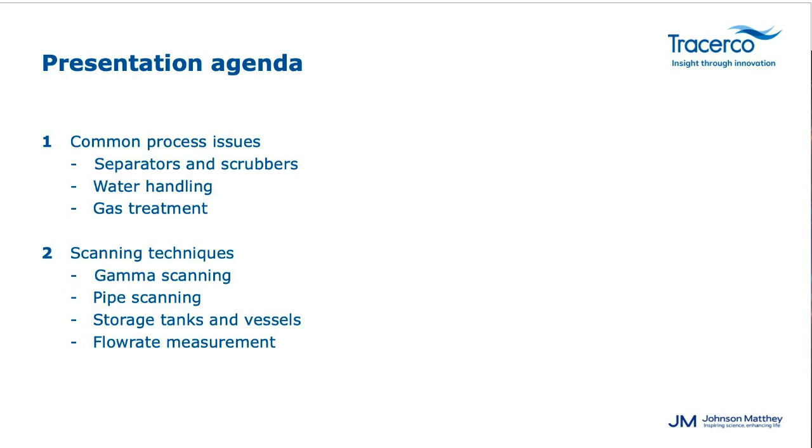Good morning and good afternoon, ladies and gentlemen. My name is William Rivers. I'm the new Markets Manager for Tracerco, and welcome to today's webinar. Today, we're going to be taking a close look at some of Tracerco's techniques that can be utilized to help optimize and actually solve some of your offshore process problems. During today's presentation, we'll be discussing common process issues, as well as the techniques Tracerco uses on a daily basis to help solve customers' problems and issues.

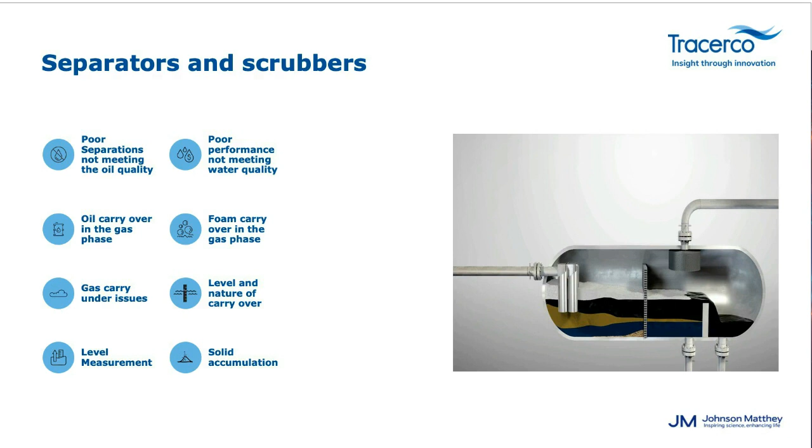So we're going to go through some of these issues now with the next slides. When we come to gas treatment and conditioning, whether it involves gas treating facilities, gas dehydration facilities, or gas drying or separation, there are a number of issues that can impact the performance of the plant, whether it's not meeting the gas treating performance plant or the CO2 or the dehydration capabilities.

And that could be due to internals, or could be some slugging, overloading, or recycling. It will be very difficult to actually do any CFD and give you an accurate root cause of the problem. But if we utilize the capabilities we have in Tracerco, for example tracer injection and pipe scan, as well as gamma scan, we'll be able to determine exactly the root cause of the problem, especially when we use the tracer injection.

And we could use the tracer injection relevant to the different phases. We could use gas tracer injection, oil tracer injection, the organic tracer, or aqueous tracer injection. All these tracers, when we utilize them in the system, will be able to give us exactly what's happening within the vessels, whether it's caused by bad distribution, bad internals, or bad design altogether. So we have quite good capabilities to do that.

When we come to produced water issues, there are different aspects of produced water that need to be addressed. If you have poor water quality coming out of the separators, the poor quality can be due to, again, the usage of chemicals, the wrong use of chemicals, excessive amount of usage of chemicals, internal design, or damaged internals.

But also, bad water quality can be influenced by flow pattern, as well as solid accumulation in the system. And of course, there is poor water quality in the primary separation, which is the separators, or there's poor water quality coming out of the secondary and tertiary stages of the treatment.

And in all these cases, gamma scan, neutron backscatter, and tracer injection can be used to identify those factors, those elements. Of course, very often we start with the simplest process diagnostic, and if required, we go to the next stage and the next stage.

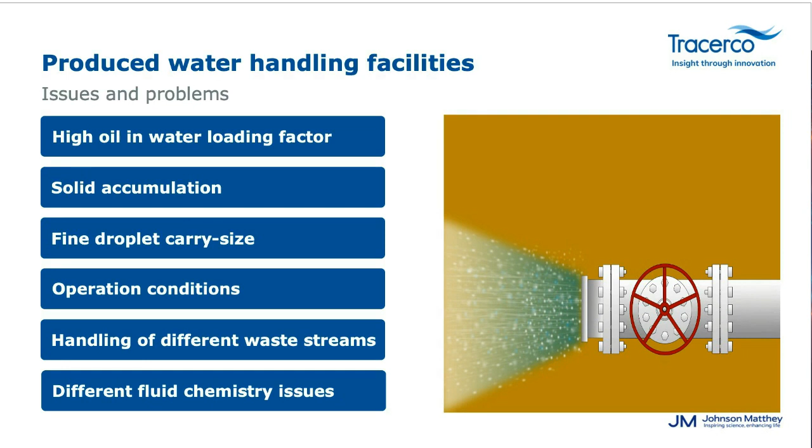When it comes to actually identifying the characteristics of the water, there is, of course, understanding the droplet size of the water throughout the process, and if there's any impact of solids accumulation or solid carryover with the liquid. This will be used by using conventional techniques available to the industry for measuring the oil droplet size or the solid distribution, quantifying the amount of solids in the system.

So overall, when we have issues with produced water, the combination of understanding the issues in the separators, which is the primary treatment stage of the water treatment, and combining the understanding of the performance and the droplet size distribution in the water in the second and third stages, we'll be able to understand exactly whether the root cause is in the systems upstream of the produced water system or within the produced water system.

And by doing this, then we could focus on how to address it and how to resolve these problems. But there are a number of issues that can influence produced water quality: operational issues, hardware issues, chemical issues, and also the common practice they do in the plant.

By doing this process diagnostic, by looking at all aspects of the separator's behavior, the produced water treatment, and the produced water quality and characteristics, we'll be able to understand where the problems are and how we're going to fix it, whether it's upstream, downstream, or within the produced water system.

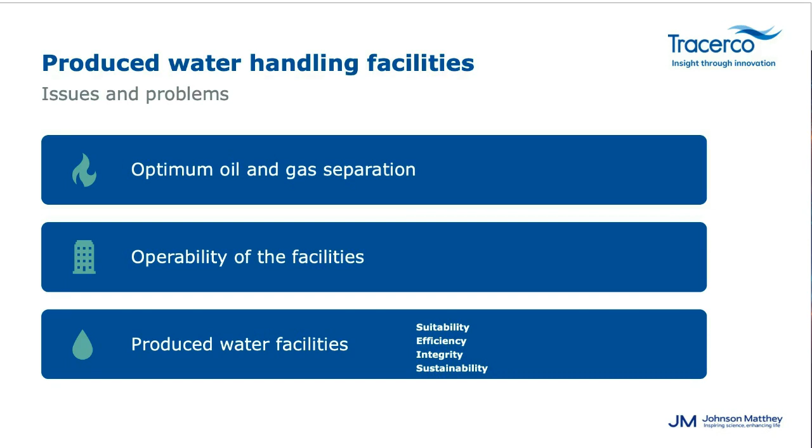Thank you, Wally. Now let's explore Tracerco's first technique, gamma scanning. Gamma scanning utilizes a source and detector to create a density profile, and based on this profile we can determine what's going on inside of your process equipment.

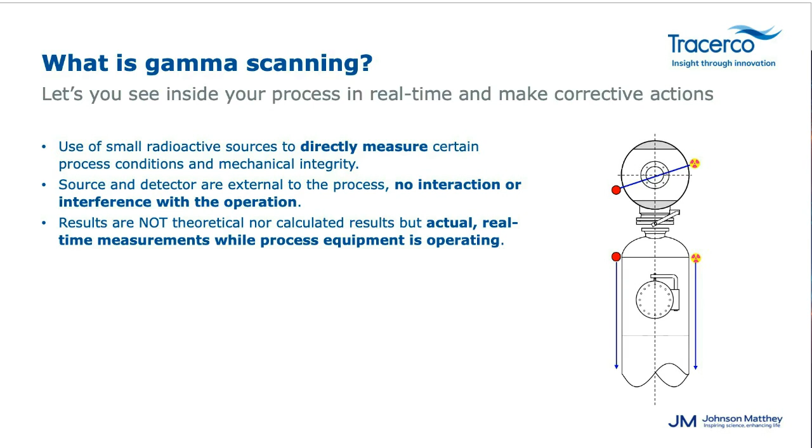Please keep in mind that when doing a gamma scan, or any one of our techniques, this is a real-time measurement. There's no need for shutting down the process equipment or interfering with your normal day-to-day operations. This is an actual real-time measurement while process equipment is operating.

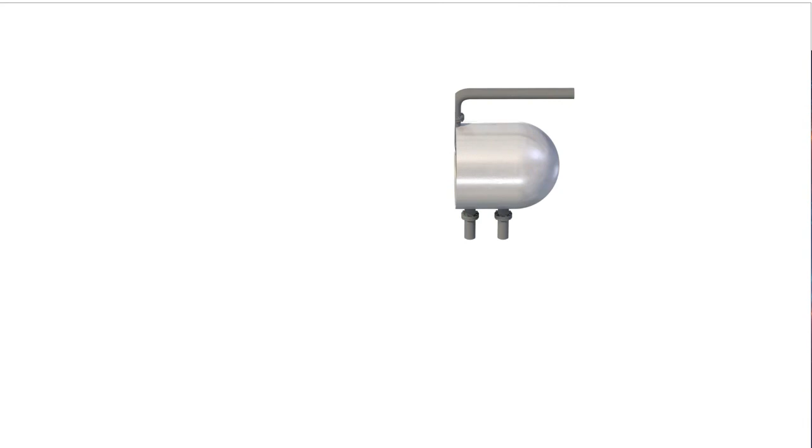To follow up with what Wally said above, let's take a look at the different techniques used to diagnose process issues offshore. The first is the gamma scanning technique. As you can see in this example, on the left-hand side is a radiation source, and on the right is a detector. We start at the top and move our way down, creating a density profile. In this case, we were looking for the liquid bulk level inside of this separator.

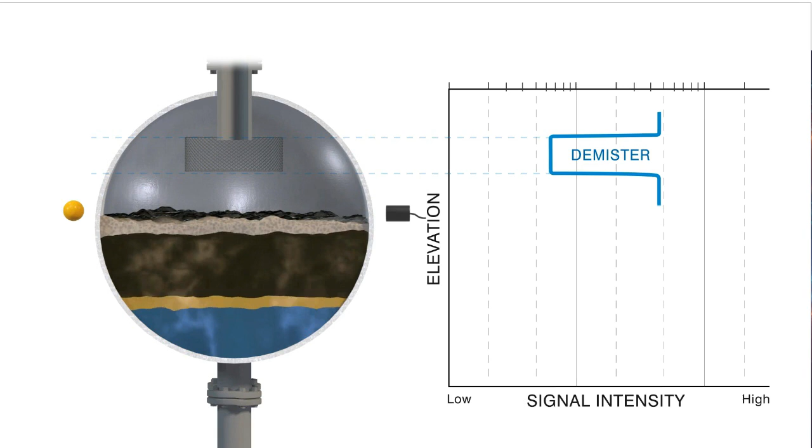Another technique that Wally described was scanning for internals to see if they're in place. In this example, with the radiation source on the left and detector on the right, we scan from top to bottom looking for a density step change. In this case, the density profile on the right shows that the demister is in place.

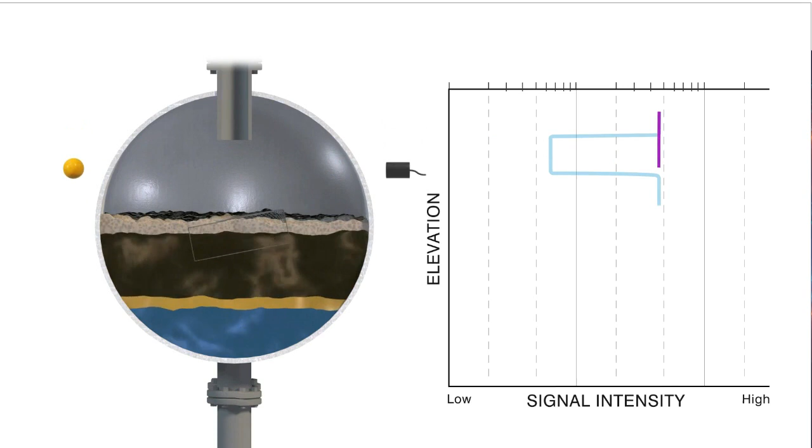Now in the second example, let's explore what the profile looks like when the demister is not in place. Again, scanning top to bottom, you can see over on the right-hand side, in purple, that there is no profile, which indicates that the demister is not in place.

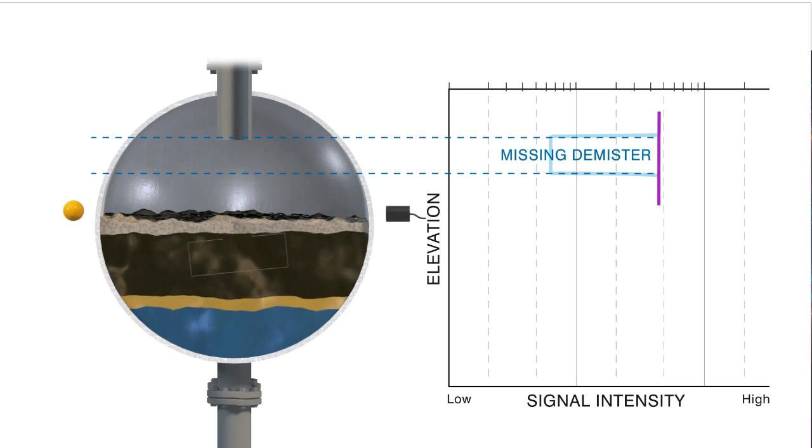Please keep in mind that you can use the same technique to determine if your baffles are in place, or if your mixing box is in place as well.

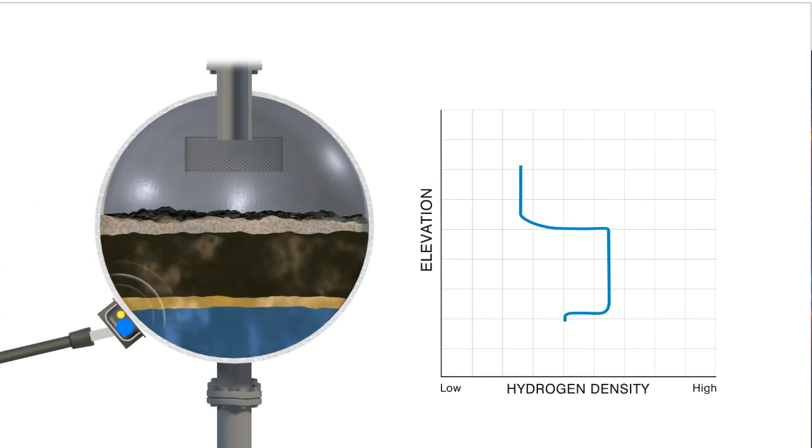Another type of technique that can be utilized is called a neutron backscatter. This technique is used when you wish to identify the different types of layers inside of your separator. Starting at the top and working your way down to the bottom, we can see based on the density profile that there are five different types of layers: a vapor layer, a foam layer, an oil layer, an emulsion layer, and finally a water layer.

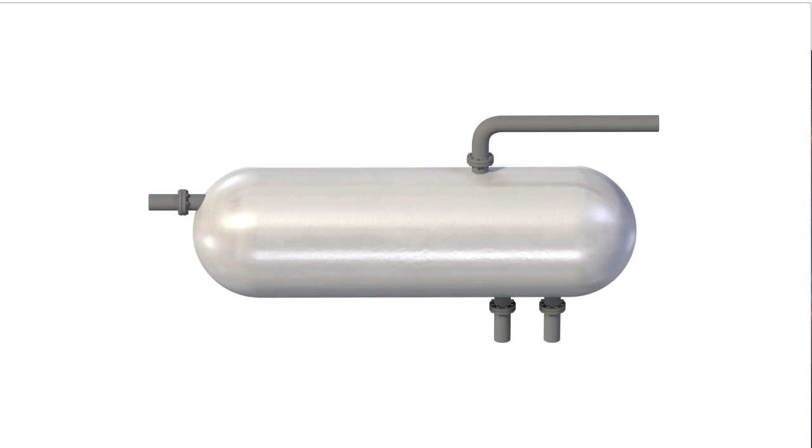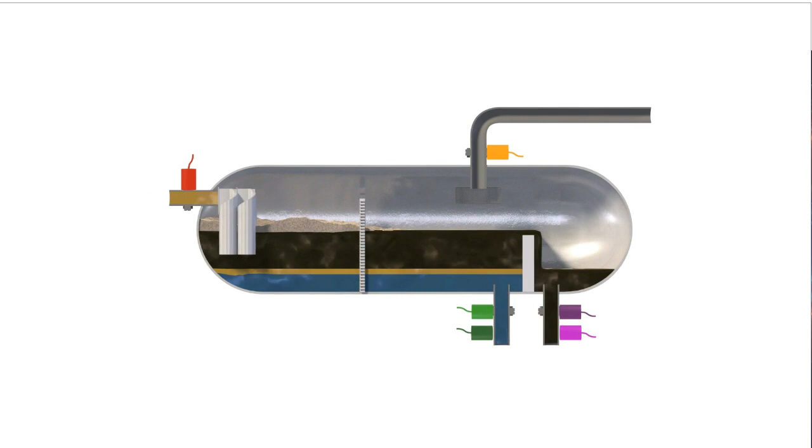The last major technique we can utilize for separation process issues is a tracer study. A tracer study reveals residence time as well as carryover and carry-under. On each major inlet and outlet, a detector is placed.

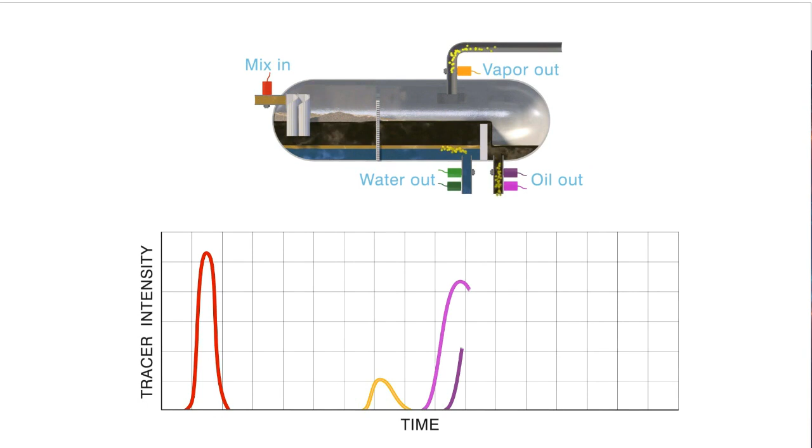A pulse of radiation is released upstream of the separator, flowing through the first inlet detector, through the separator, and out of the major outlet devices within the separator. From this, you can gather the residence time, the carryover, the carry-under, as well as oil velocity and water velocity.

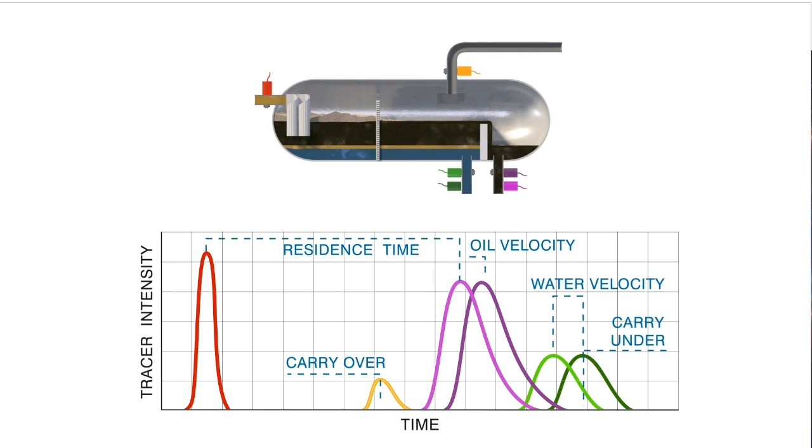Now we'll begin to talk about scanning pipe on offshore facilities. A technique that we commonly use is called PhaseFinder. This utilizes neutron backscatter technology in order to find deposits inside of your pipe.

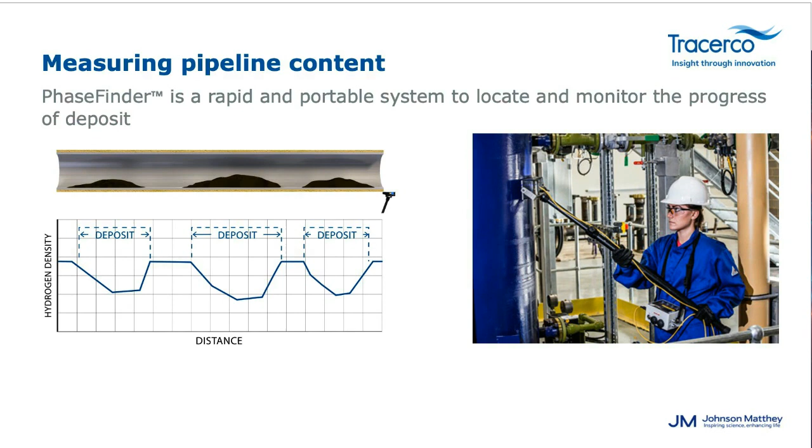The way this technique works is we take the neutron backscatter device, place it on the pipe, and slowly walk along the pipe looking, again, for density changes. As we find the density changes or deposits, we will mark on your pipe where these deposits lie.

If you'd like to look in more detail at what deposit growth is, or the size of your deposits inside of your pipe, we can perform a ThruPipe scan. A ThruPipe scan is a radiation source and detector attached to a yoke. We take this yoke and we walk down your pipe.

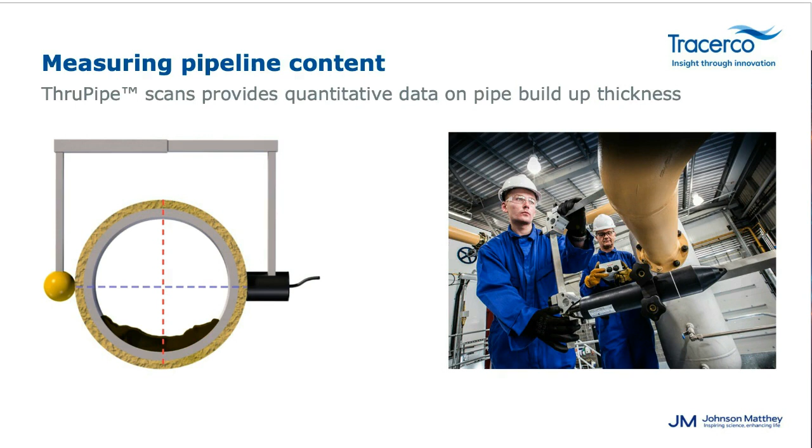As we identify a density change, we rotate it 90 degrees, back it up, and then walk forward again, scanning the same area. This will give a better representation of how high or how large your deposits are inside of the pipe. The last type of scan we can use on pipe is called a ThruVision.

A ThruVision scan is the most highly detailed scan in Tracerco's arsenal. The way it works is we take a source and detector and place them 180 degrees apart on your pipe and rotate it into 9 different positions. From those positions, we can extrapolate over 1,000 points of data.

We translate that into a color-coded map of your pipe, as seen on the left-hand side of your screen. Anything in red is considered highly dense material. Anything in blue is considered less dense material.

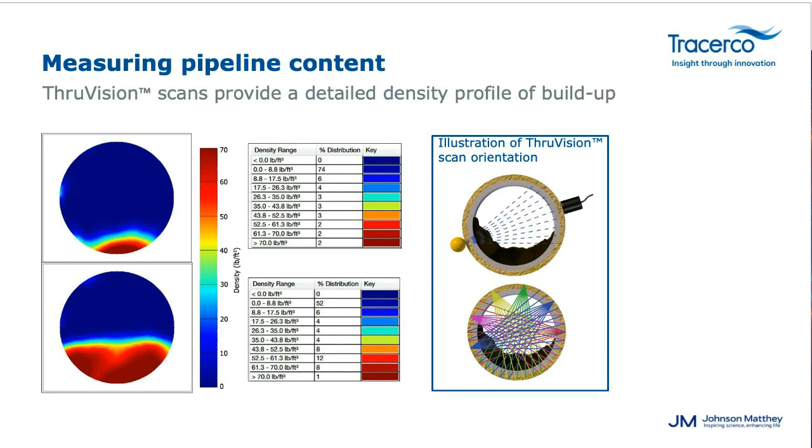For this scan to be most effective, it needs to be performed on a minimum of a 12-inch piece of pipe. Typically, we do these scans on flare lines that have not been cleaned out in some time.

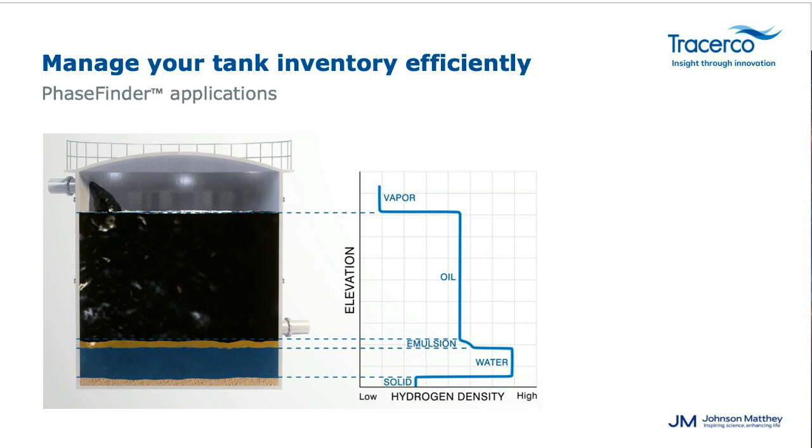Let's move on to another area that Tracerco scans quite often: storage tanks and vessels. As in the separator study, PhaseFinder, utilizing neutron backscatter technology, can help identify the different types of layers inside your vertical tanks. As in the example, starting from top to bottom, you can see there's a vapor layer, an oil layer, an emulsion layer, a water layer, and a solid layer. This is a very efficient and easy way for you to scan quickly and tell what's inside of your tank.

For our final technique, we'll be discussing flow rate measurements and the benefit it can offer you in offshore environments. Similar to a tracer study in a separator, flow rate measurements is used primarily to verify instrumentation is working correctly.

A pulse of radiation is released upstream, travels past 2 detectors. From there, it's a simple calculation of distance over time to verify the instruments are working correctly. Again, this is primarily used to verify instrumentation is working correctly.

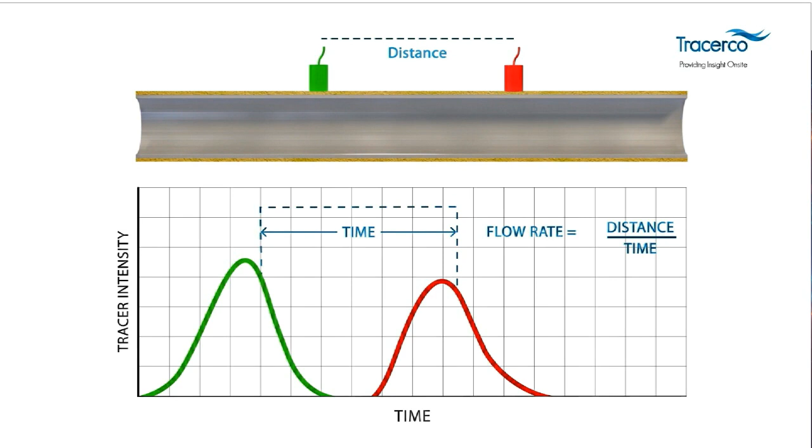Let's now look at a few case studies to demonstrate the value of the technologies discussed above. In our first case study, one of our major operating partners approached us and expressed concern that they were having carryover problems in one of their major vessels and asked us to perform a gamma scan to verify that all the internals were in place.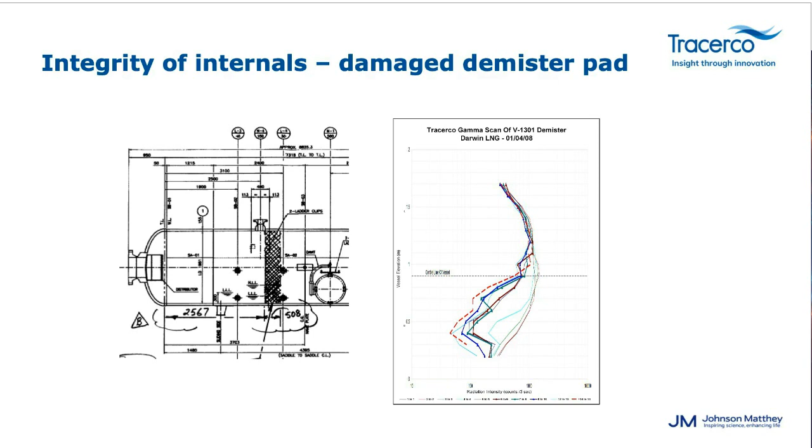As we move down the vessel towards the bottom, the density dramatically shifts to the left, indicating the presence of collapsed demister pieces. As you can see in the scan example on the right of the slide, you'll notice a long snake-like curve starting at the top and curving its way down to the bottom. If the demister was present, the scan's line would have been more tight and in a vertical straight line.

As you can see on the left side of the picture is what a demister should look like when it's in place. And on the right, the damaged demister, which was confirmed by Tracerco Gamma Scan.

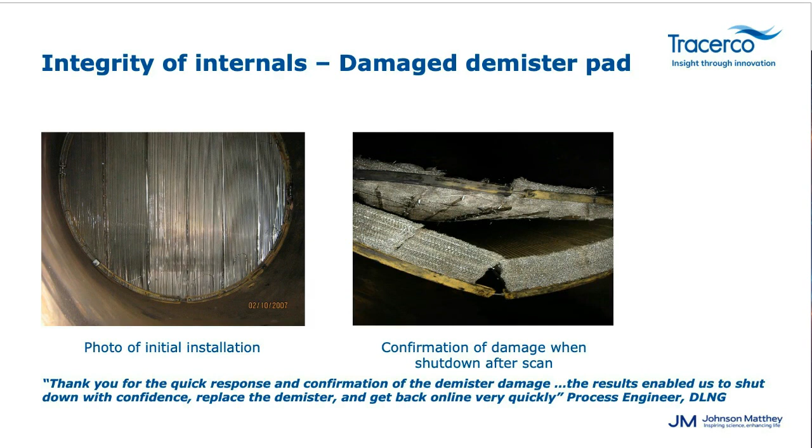In our second case study, Tracerco was helping our customer determine how large the emulsion was inside of their separator. Neutrons were selected as a technique to determine the size. We started at the top of the separator and worked our way down the side. As you can see in the graphic, there is a vapor space, which is represented at elevation 920 to elevation 830 by the blue line starting at the left of the graphic and running straight diagonally to the right.

From this point, the oil layer is measured. In this case, the oil layer is from elevation 830 to 710. Further down the scan, you can see a sharp density shift from elevation 710 to 110. This is our emulsion layer. As you can clearly see, there is no water layer present. The water is mixing inside the emulsion.

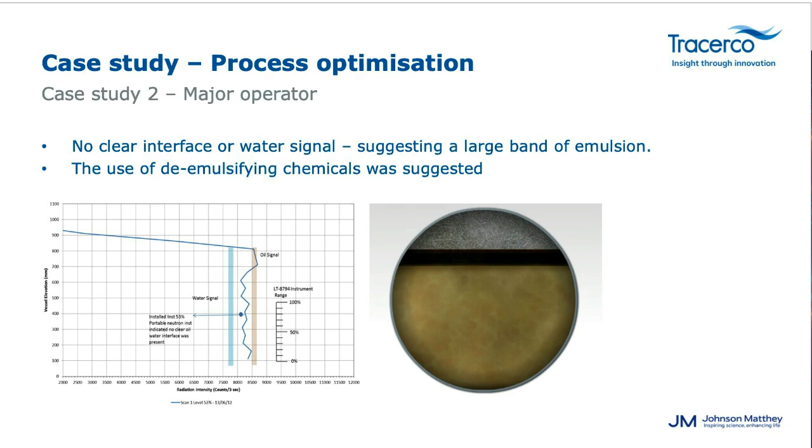Upon the customer receiving the news of our results, we suggested that the use of a demulsifier chemical was needed in order to restore balance to the separator. After the demulsifier chemical was added, you can see the separator process improvement, as now the water layer is clearly present at elevation 350 to 110.

There's only a slight emulsion layer from elevation 410 to 350. By painting a clear density picture of the customer separator, they were able to take action quickly and solve their problem.

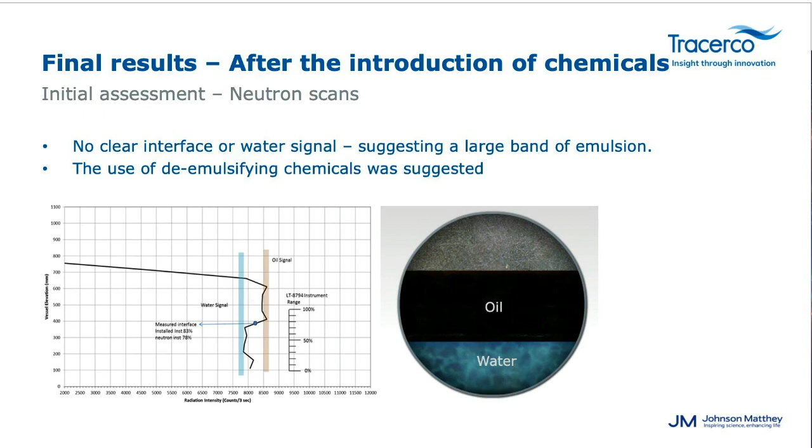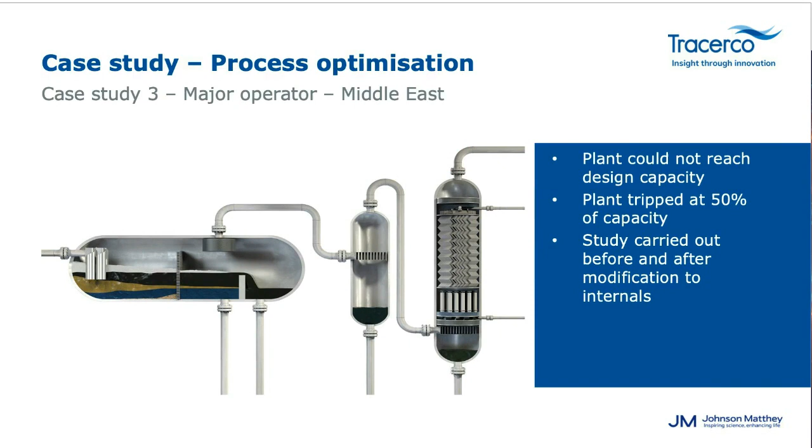For our third case study, one of our major customers was having problems with their plant not reaching design capacity. After further investigation, they found and narrowed the problem down to two separators. Tracerco recommended a tracer study to determine which separator was causing the issue.

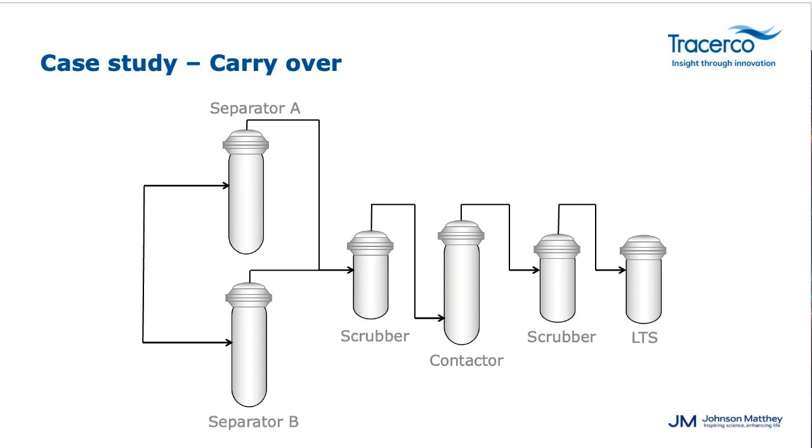A dose of radiation tracer was injected upstream of the separator. Traveling towards the first detector in red, we can confirm that the radiation has passed through and registered a confirmation pulse. The tracer enters the separator and immediately registers a stronger, wider pulse on the outlet side of the separator, as depicted in green. The yellow detector confirms there is no outside radiation interference and all results are accurate.

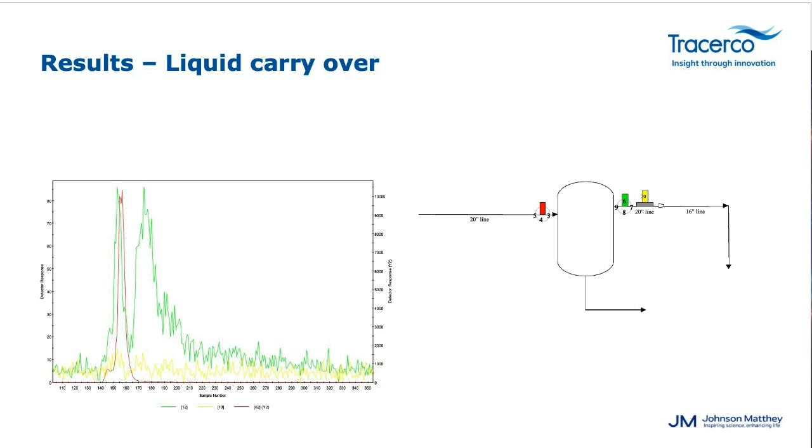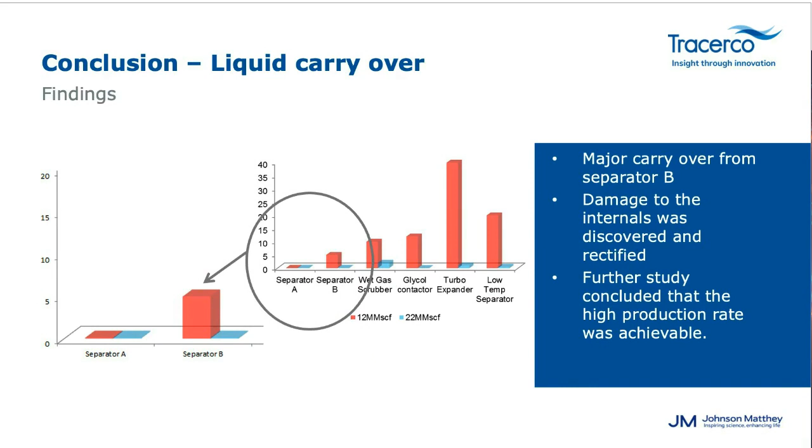After the separator was repaired, the customer asked us to repeat the test. The results were that no carryover was present, and the plant went back to operating normally.